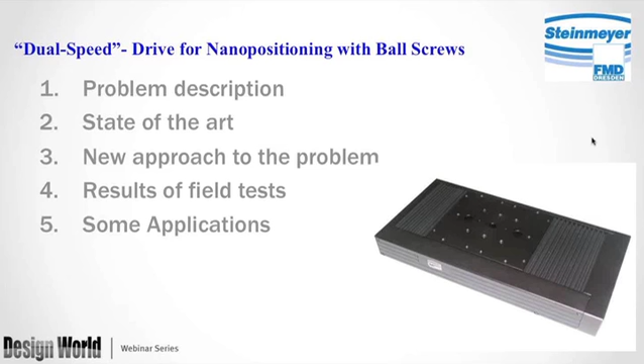So let's see, okay, here we go. Sorry about that. Okay. So basically, the presentation will be in 5 parts. The first thing we're going to do is describe the problem itself. Then we're going to move on to describing what we view as the current state of the art. In other words, what's the current state of solutions to this issue. Then we're going to introduce a new approach to the problem, follow it with some results of some field tests, and then discuss some applications.

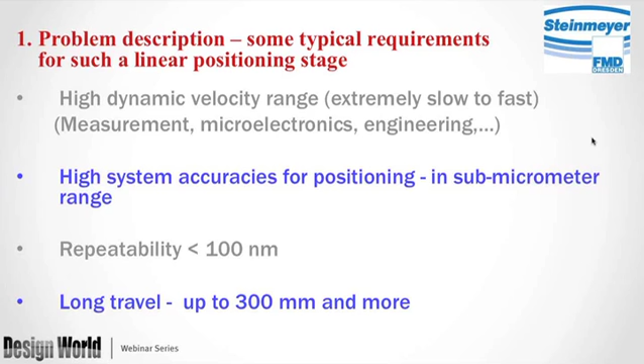So the description of typical requirements for such a stage. Clearly, we mentioned that the application requires a relatively high dynamic velocity range from extremely slow to fast, and we'll define that shortly. And you can see that in various applications, primarily in the measurement field, microelectronics, inspection arena. The stage also requires relatively high accuracies for positioning, typically in the submicron range, with repeatabilities to typically less than 100 nanometers. And also, here's the key, long travels could be up to 300 millimeters and maybe even more.

So another way to look at this, and you'll notice that curiously enough, we've provided an image of also another high-performance German product, a Porsche, and that has a speed range in the neighborhood of 1 kilometer per hour up to 300 kilometers per hour, or roughly a ratio of 300 to 1. On the right-hand side of the screen, you can see another precision product. In this case, it's a stage, and typically that speed ranges from 50 microns per second, 0.05 millimeters per second, up to 100 millimeters per second and more, or in other words, a dynamic range of 2,000 to 1.

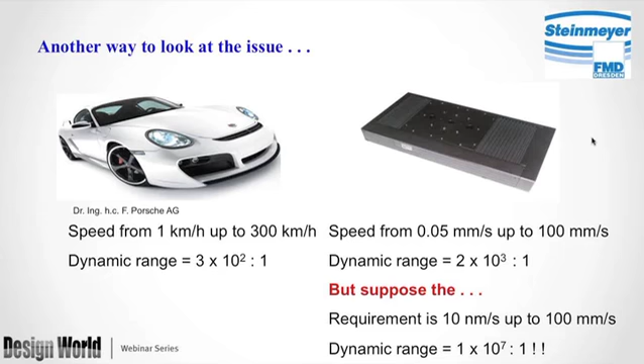But suppose the requirement is considerably greater than that. Say it's 10 nanometers per second up to 100 millimeters per second. In other words, a dynamic range of 10 million to 1. So the question is, how does one go about doing that? The current state of the art generally offers three possibilities. The first one is fairly conventional, ball screw driven by a DC motor or a stepper motor. And the advantages are that it can be used in any orientation, especially vertical. It is certainly cost effective, and it's a very production-tested principle and robust design. The disadvantage is that it's a relatively low dynamic range in the neighborhood of 2,000 to 1, which certainly can address certain areas of speed.

Another possibility is direct drives, whether they be conventional linear motors, electromagnetic, or piezo linear motors. These are still relatively cost effective.

They can achieve very high accelerations and velocities, and certainly don't exhibit any drive wear because they're non-contact. At least the electromagnetic linear motor is. It's not necessarily true of piezo linear motors, but that's a subset.

The disadvantage is that they're not very suitable in vertical usage, and that's because they typically require a brake. And also, especially in vertical usages, because of the power you need to maintain position, they generate a lot of heat.

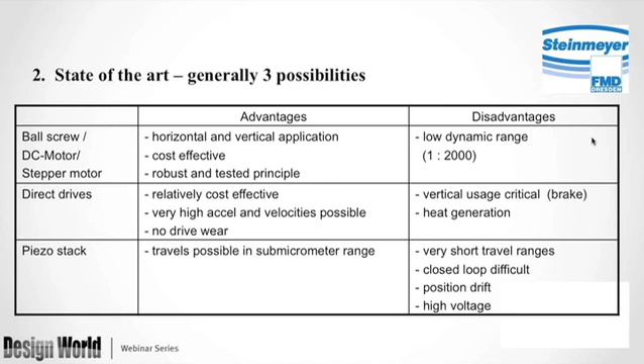The third possibility is a piezo stack, and certainly the advantages there are you can get travels down to sub-micron range, but the disadvantage is typically they are very short travels, typically on the order of hundreds of microns, maybe up to a millimeter, but that's about it. Closed loop is difficult in this. You tend to get position drift, and the power required is on the high voltage end.

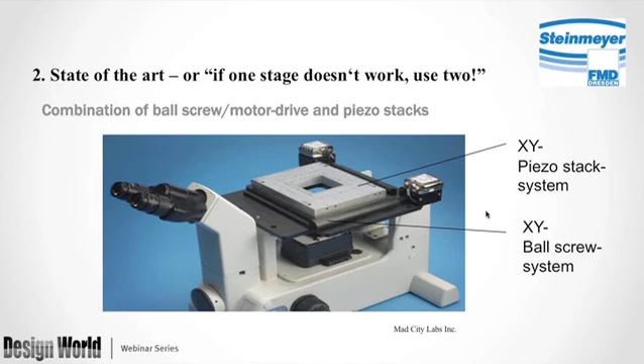So here's another view of the current state-of-the-art solution to the extremely large velocity range, and we ascribe this as being, if one stage doesn't work, use two. And this is an example of one solution where you have a lower XY stage, in this case a ball screw driven stage, and then above it you have a piezo stack. So you've got the XY ball screw system achieving the high velocity, and when you switch to low velocity, high resolution, you switch to the piezo stack system.

So what's the limitation, or what are the issues here? Basically, you've got two stages, two systems, so you end up having discontinuous positioning, and with typically lower system stiffness. You've got duplicates of everything. You've got two force generators or two drives, two measuring systems, two controls.

You have a piezo stack system, which is sensitive to shock and overload. And then because of the dual nature of this thing, you've got high costs. The other disadvantage of this is that you've also got higher errors because you've got dual linear bearing systems.

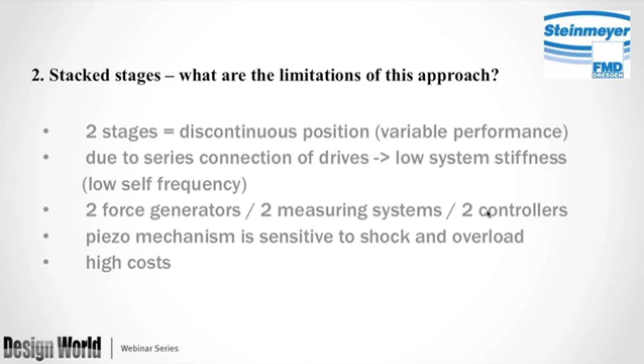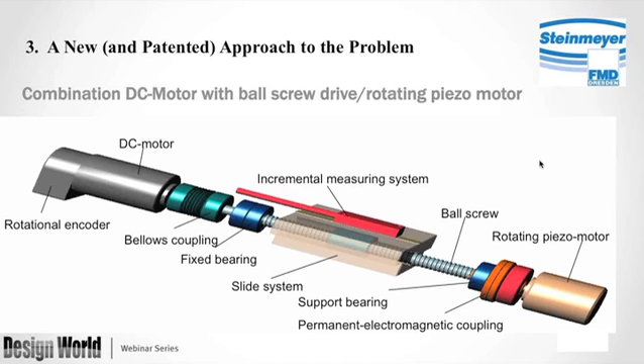And on one end, on the left side, you've got a conventional DC motor with a rotary encoder on the back. And on the other end of the ball screw, you've got a rotating piezo motor that's attached with a coupling that connects it and disconnects it. You also have an incremental linear measuring system on the stage itself.

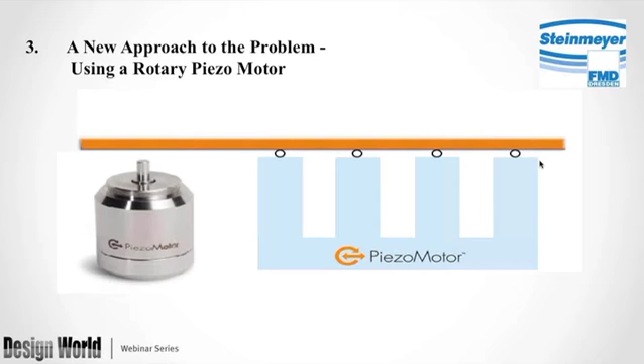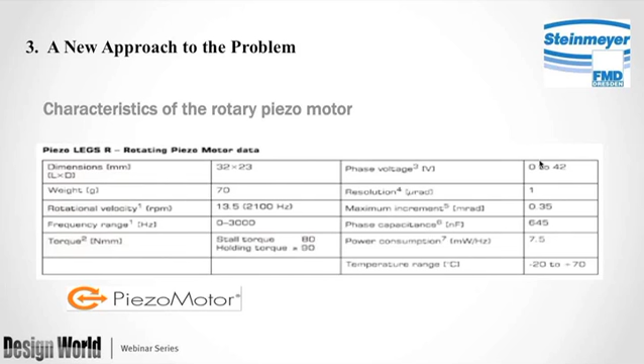For this system, we ended up utilizing a MicroE encoder with a 20 micron scale period with interpolation that lets us get down to resolutions of 5 nanometers. Accuracy is typically on the order of 1 micron.

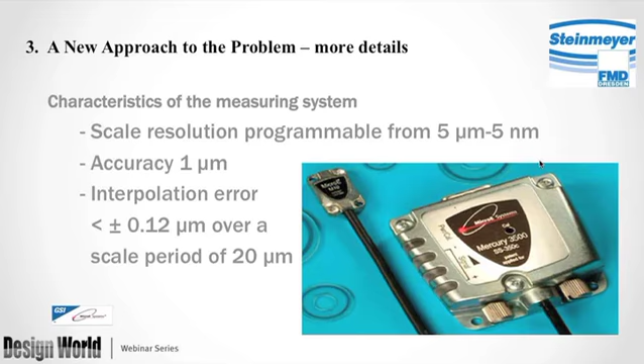This graphic shows you very clearly what our test setup was, and you can see on the left-hand side the stage is mounted vertically. The DC motor is on the bottom corner, and the rotary piezo motor is on the top. Over here is just a load, and that was, as I said, the test setup.

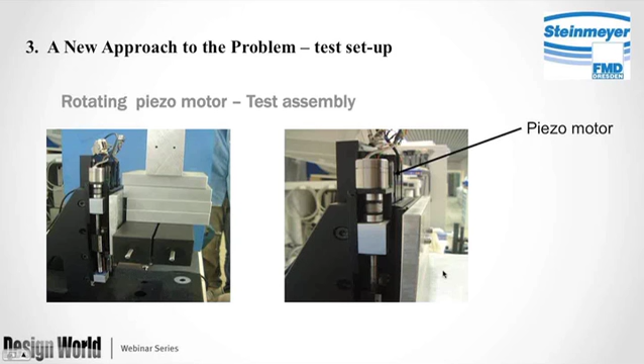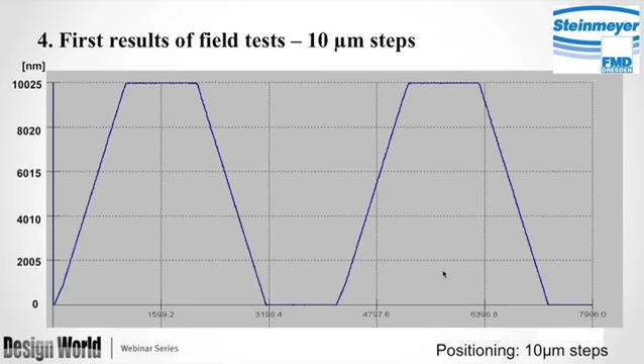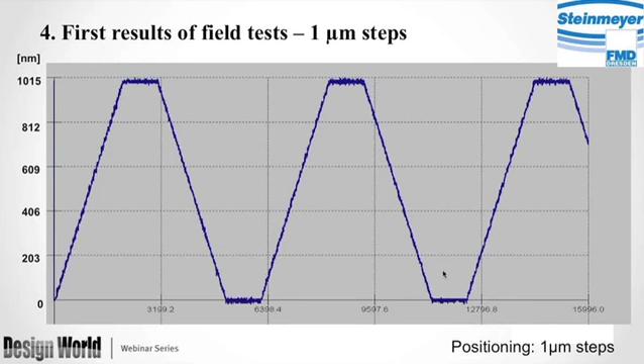The initial results of the field test: here's a graph showing the stage moving in 10 micron steps. And this next slide shows moving in 1 micron steps. And these graphs are the actual reading from the encoders. So this is actual motion, not necessarily commanded motion. So this basically demonstrates that it is actually moving in these increments.

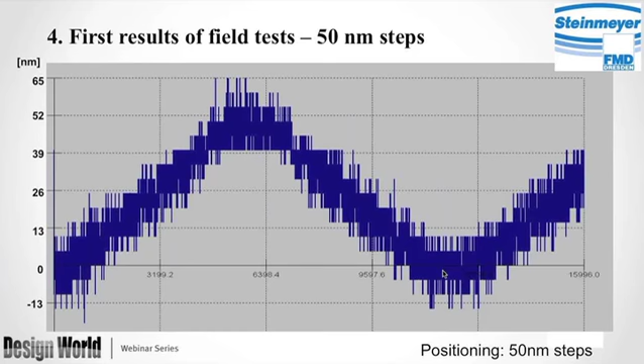So, by way of review, for what we call the dual speed stage, we now have the possibility to create very, very slow or quite rapid motions with a common drive in a single stage. And the key is that we're no longer limited to only extremely small movements, very slow movements. So that's the key.

You have a single system that eliminates the need for the stacked stage approach to this very, very wide speed range that is required, and also the motion of being able to move in nanometer motions as well as nanometer per second motion as well as millimeter per second motions.

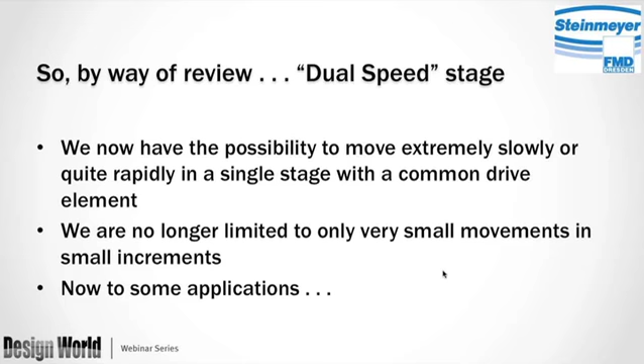But anyway, they were faced with the issue that as inspections become more and more complex and parts become larger, they're forced to provide 3D inspection with Z travels that are larger than 1 millimeter, for example, and that's where something like this would have a great application.

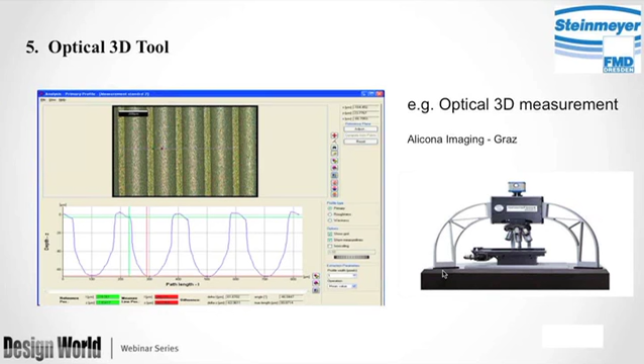So where the inspection applications, or in this case confocal microscopy, require motions greater than 1 millimeter, then you have to use some other means to achieve that larger motion before you get into this finer motion. And with this dual speed approach, you don't. You use the same stage for those motions.